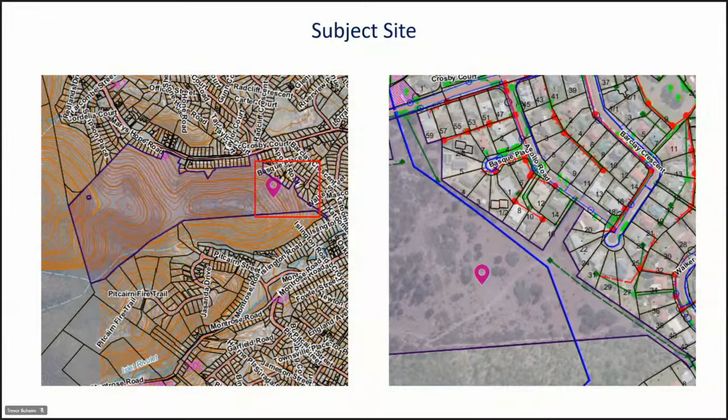So this application is actually assessed under the Glenorchy Interim Scheme 2015 because the application was valid before the new planning scheme came into effect. So three zones apply to the proposal, and the proposal is considered to accord with the intent of each zone.

Most of the proposal is within the low density residential zone. You can see that in the form of a pink triangle, and I've written over the top what the zoning is. The purpose of the zone is to provide for residential development where there are some constraints. In this case, the proposal is for larger lots on steep land.

Then lot 1 and part of lot 15 are within the general residential zone. That's the part of the land that adjoins Mary's Hope Road. But only lot 1 is assessed under the provisions of this zone because most of that lot is within the zone, while for lot 15 only a small part is within that zone. The purpose of the general residential zone is to provide for residential development on serviced land, and there are service connections in Mary's Hope Road for lot 1.

Then the third zone only really affects the balance lot, and that's the green or turquoise zone - the environmental management zone. That applies to the balance lot, and it does include a building area. It also applies to the access strip at the end of the triangle for lot 13 that goes to Islington Road - that's a very small part of the lot within the environmental management zone. However, the building area is noted to be situated within a cleared area within that zone, and the access strip would require minimal vegetation clearance, so it's considered that the development also complies with the environmental management zone.

It's also noted that there is an easement on the southern side for bushfire management, which is within the subject lots, but they'll be outside the building area for those lots. On the eastern side, we have an easement for power lines, which is also going to double for bushfire protection as well - that is actually external to the subdivision.

And then as part of the balance lot, it's proposed to adhere to the titles, so that there'll be only one title for the balance lot. But there's no development other than the proposed building area for the balance lot.

So the lots vary in size between 1,001 square meters and 2,492 square meters, and there are 2 internal lots as well, and the building area, like I said.

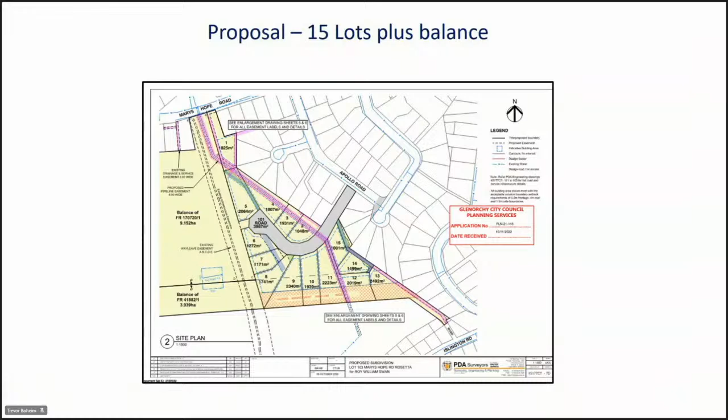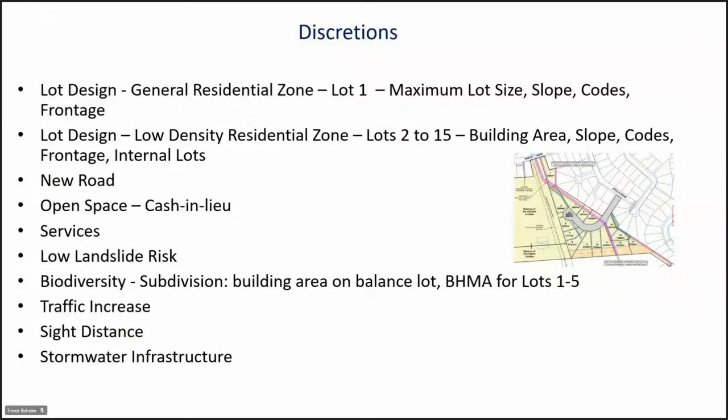You mentioned before you didn't want to address the authority, though. I just want to check you don't want to address the authority tonight? Yes, I'm sorry, I'm a little bit... Oh, that's okay. I just said now, if you do want to address the authority, now's your opportunity, but you don't have to, no pressure. No, I don't want to. That's okay, no problem. Thank you.

And we do have one of the applicants, Mr. Swan, here. Would you like to address the authority at all, Mr. Swan? No, not at this stage, unless there's any questions. Okay. Oh, Mr. Swan, you mean? Yep.

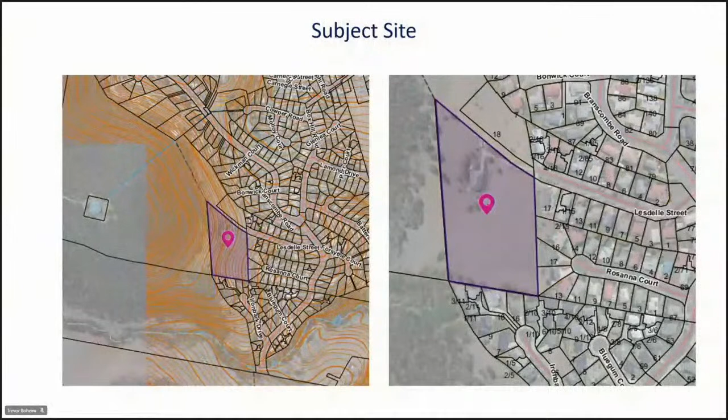Thank you, Chair. Can we have the first slide please. The subject site, the principal site, is 19 Lesdelle Street, located on the western end of Lesdelle Street. On the left-hand side you can see a map where the site is highlighted in purple on the side of the hill. On the right-hand side you can see the same site a bit more close up, showing it's at the end of Lesdelle Street and contains an existing house. You'll also note it's mainly cleared of vegetation. The other two addresses, 18 and 29 Lesdelle Street, are affected by the subdivision for the road lot, and the property at 2/10 Ironbark Drive, in the southeast corner, is affected by a service connection. Next slide please.

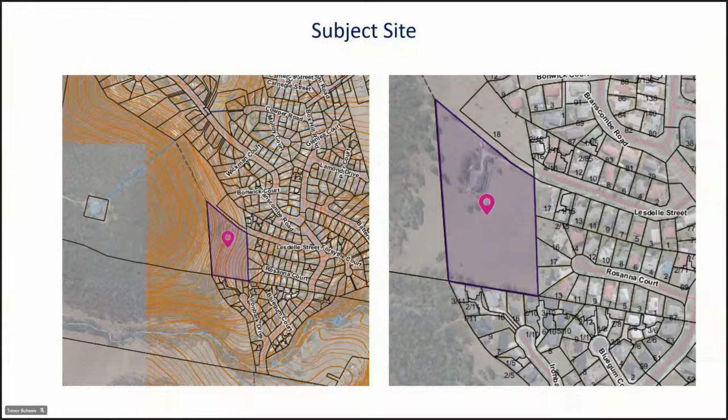So all of the property is located within the general residential zone in red, and an adjoining environmental management zone in olive to the west.

Again, the proposal accords with the purpose of the general residential zone, which is to provide for a range of residential developments, which includes multiple dwellings. The general residential zone goes around 3 sides of the property, and where the hill and forested area are, that land is within the environmental management zone. That won't be affected by the proposal at all.

Can we have the next slide, please? So this shows the proposal. The application is for 28 additional dwellings on a site with an existing dwelling and subdivision for a road lot.

You can see on the right-hand side we have the end of a cul-de-sac. That's not there at the moment, so that's part of the application. The road finishes in a dead end at the moment, and a small amount of land will be taken for the area of the cul-de-sac, where there are currently 3 access strips for 18, 19 and 29 Lesdelle Street.

The cul-de-sac was necessary to service the proposal with waste management. The proposed dwellings will be arranged in 5 rows around internal roads, and the existing dwelling would have separate access with the existing driveway, as you can see on the plan.

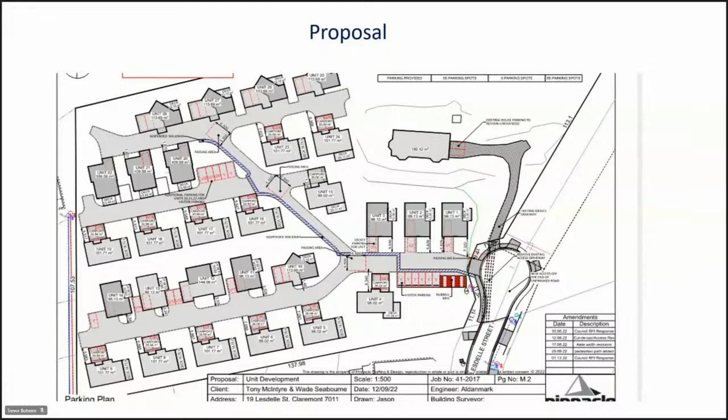It's proposed to do the development in 7 stages, so there'll be staged titling, and also 7 stages for the proposal. In terms of discretions, let's have a look at the site photos first.

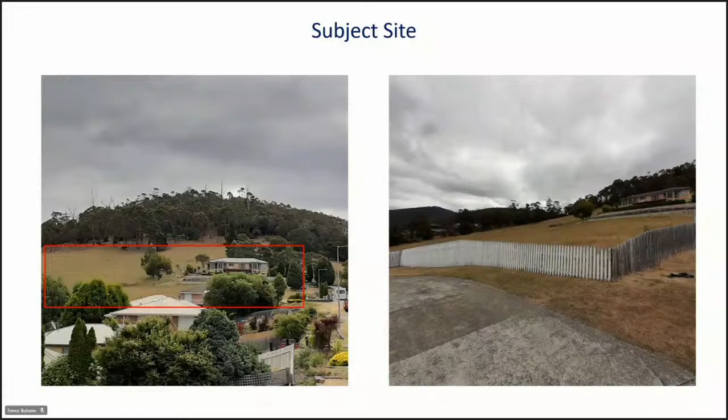Next slide, please. So this shows the access, the dead end at the moment. The front part of that access strip is where the cul-de-sac is going to be. The photo on the right-hand side is looking back down at the houses in Lesdelle Street. That's looking east. Next slide, please.

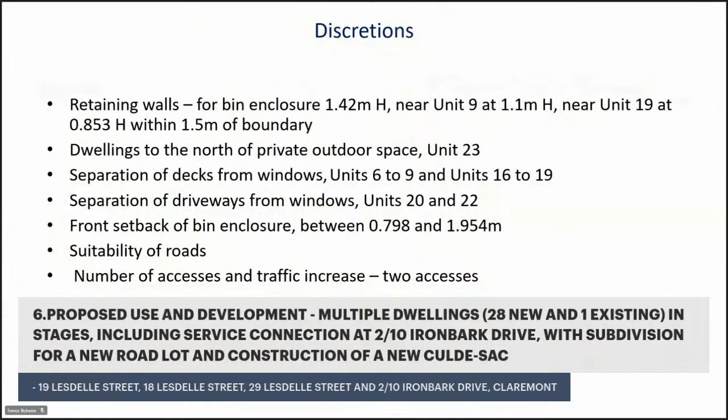Next slide, please. So this is showing the discretions. Retaining walls are usually discretionary for two reasons: either they're higher than 1 meter in height, or they're closer than 1.5 meters to the boundary. There's discretion for the retaining wall for the bin enclosure, which is 1.42 meters in height. There's also discretion for a retaining wall near unit 9, that's 1.1 meters high, and one near unit 19, that's less than a meter high but within 1.5 meters of the boundary. It's considered that those retaining walls are acceptable and would not cause any problems in terms of overshadowing or anything like that.

Another discretion is for dwellings to the north of private outdoor space. A lot of the dwellings do comply. There's usually a private outdoor space area, which on the landscape plan - I think it's the third or fourth plan in the attachment - that's the nominated private outdoor space. It's a minimum of 4 by 6 that each unit's got to have, although most units have more than that, but that's the private outdoor space that has to comply with certain requirements.

Some of the dwellings do have private outdoor space to the north. However, they comply with the performance criteria because only half of it will be affected on the shortest day of the year, which satisfies the criteria. It's only unit 23 that cannot comply, with more than half of its private outdoor space affected by the other unit. However, that dwelling's primary private outdoor space is nominated in front of the unit, but they also have more private outdoor space at the back, plus a balcony. So despite the nominated space being affected, it was considered there's sufficient private outdoor space to cater for residents' needs, and that was deemed acceptable.

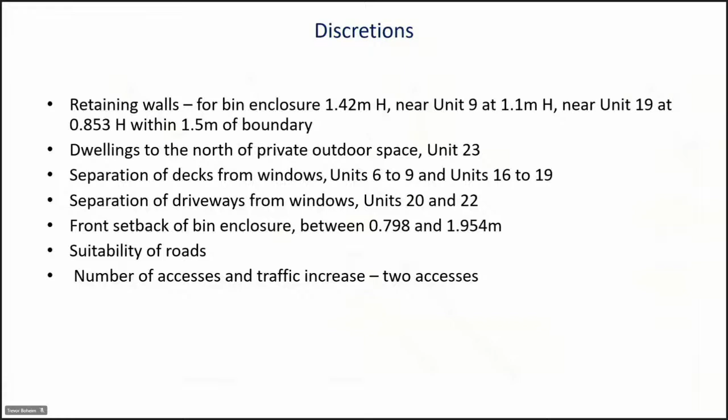In terms of representations, we received four. The first issue concerned the road network, specifically the capacity between the Southern Outlet and Kalang Avenue, but those locations are outside the Glenorchy Council area, so we can't do anything about that. In terms of overall traffic, it was considered that the existing road network can cope quite easily with the additional traffic, so that was considered satisfactory.

The next issue raised was fencing costs. Fencing costs aren't regulated by the planning scheme, but rather under the Boundary Fences Act, so it's usually an issue between neighbours who must negotiate anything about fences. That's outside of what we can consider under the planning scheme.

Another issue raised by 3 of the representatives was building height, privacy and overshadowing. That is actually something the planning scheme does regulate. The main concerns were units 6 and 7, a unit in the bottom row in the middle, and unit 14 in the second row on the south boundary. We looked at that, and those units comply with the maximum height. Maximum height is 8.5 meters, and the highest of those 3 units is 7.2 meters in height.

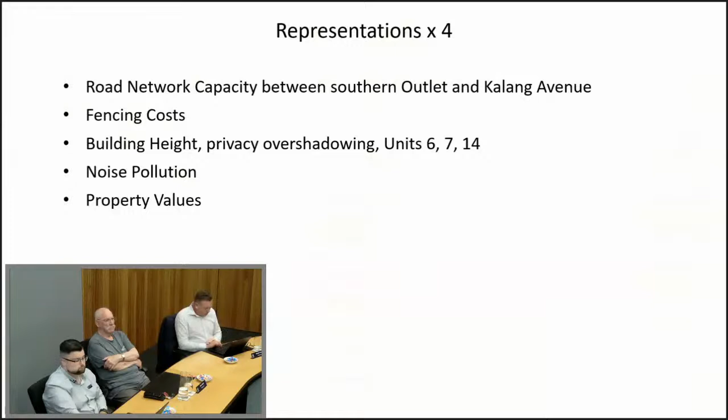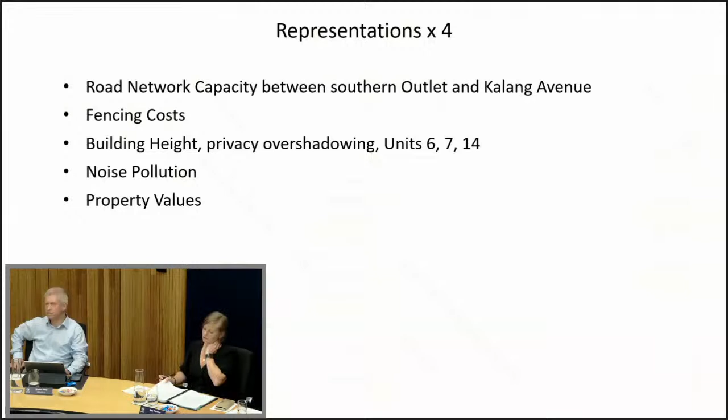The next issue was noise pollution. People were concerned about noise from the dwellings, but that's not something we can look at, since the planning scheme only regulates noise from industrial sites, not residential properties. Of course there will be a change, as at the moment it looks like a semi-rural, quite serene area next door, and that will change with urban development. But it's noted the site isn't being developed to full density. The proposal is one dwelling per 640 square meters, while the scheme allows one dwelling per 325 square meters, so it's only about half as dense as it could be. It's not expected there'll be much noise anyway, no different to any other urban environment.

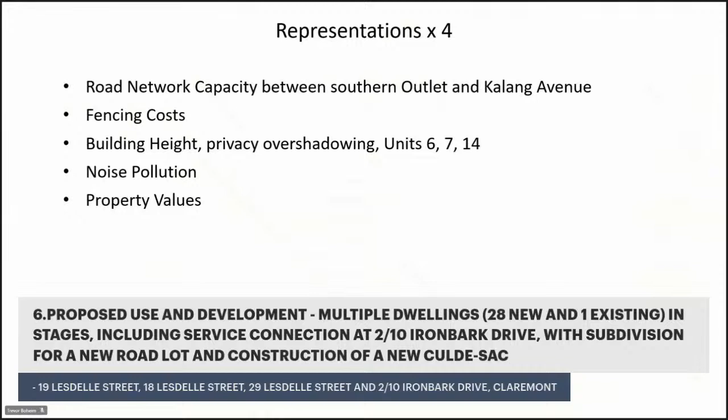The last issue raised was that this proposal might affect property values. Again, that's not something the planning scheme regulates, so there's nothing the council can consider regarding property values. It's outside any of the standards we must consider.

In terms of conditions, there will be a condition that the development is done in 7 stages, complying with the staging plan in the attachments. Again, there's a condition for maximum height of 8.5 meters, a condition for the grade of private open space as shown on the landscaping plan, and a landscaping condition for screening the bin enclosure. This is in addition to other landscaping conditions imposed by the development engineer, plus all the development engineering conditions recommended as well. Overall, the proposal was found compliant with the planning scheme and is recommended for approval.

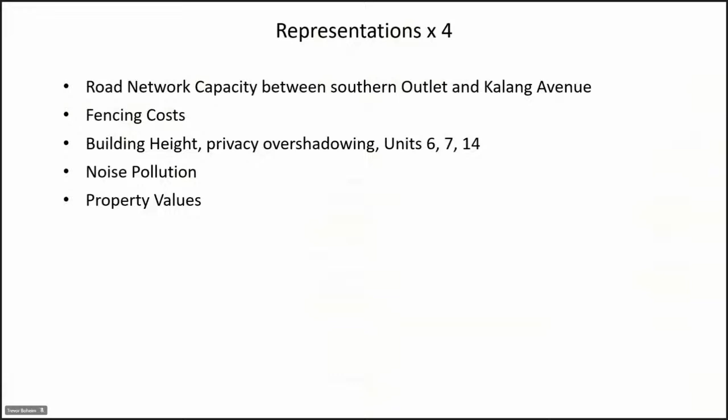Thank you, Mayor. Just a question regarding the waste collection, excuse me if I've missed the detail. Obviously there'll be bins, I'm assuming 3 for every unit? No, I think they're shared bins. The next one I think is 1 for each, but this one I believe was shared bins, a total of 30 in one of the conditions. If you go to page 127, there'll be a total of 30 bins that are shared, and not all of them collected each week, because there are alternative weeks for which ones get collected.

Question resolved. Thank you. Excellent. Yeah, so I think there's a condition.

There is one condition about waste management, condition 36, which relates specifically to the design for the bin enclosure. It says it must suit 30 by 240 litre wheelie bins. My understanding is there's nothing in the legislation that allows us to impose conditions on the number of bins, but we can give advice to applicants and ask that they work with our waste management area to come up with a solution.

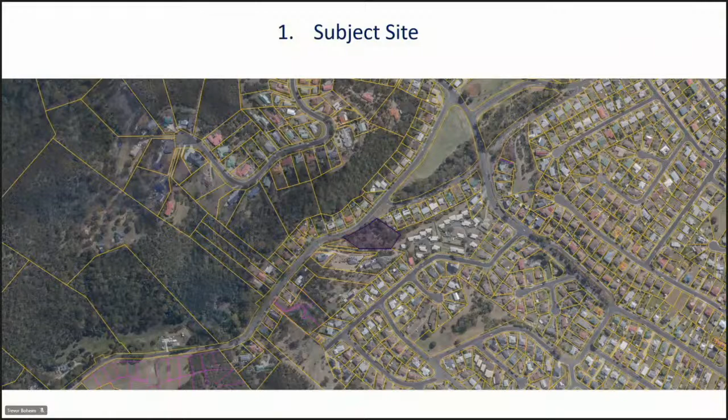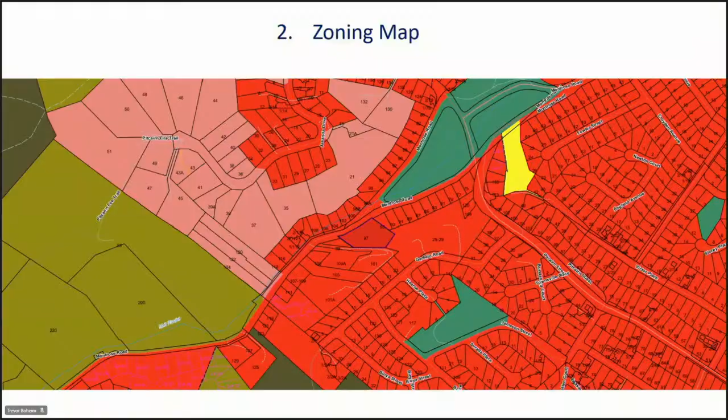If you go to slide 1, this shows the subject site. The proposal is for buildings that will range between a maximum of 2 and 3 stories, so it'll be a combination on the site. If you go to slide 2, the zoning map - the property is zoned general residential, and it's one of the remaining large undeveloped parcels of land, as you can see there at the end of Montrose Road. If you go to slide 3, this shows the site plan.

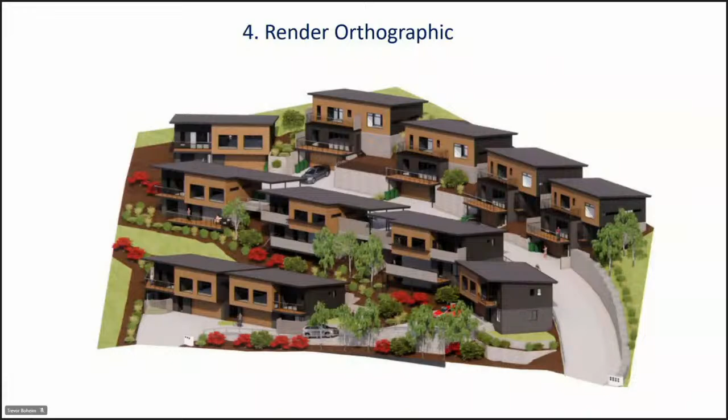So the site is particularly steep, and the way the developer has dealt with this is by providing 2 driveways on site. In addition, we had discussion with the developer for providing pedestrian access and also for managing waste pickup. The footpath is proposed to be constructed along Montrose Road in addition to works on this site.

If you go to slide 4, this shows a useful 3-dimensional proposal, and as you can see, the dwellings have been layered, so right at the back, looking down from the house above, they will look single story. You may also notice on the left-hand side there's a blank area - the proposal is burdened by an underground TasNetworks line, so this has been done in conjunction with discussions with them. The proposal has a number of discretions, mostly raised due to the slope of the site, and has been designed to minimise cut and fill.

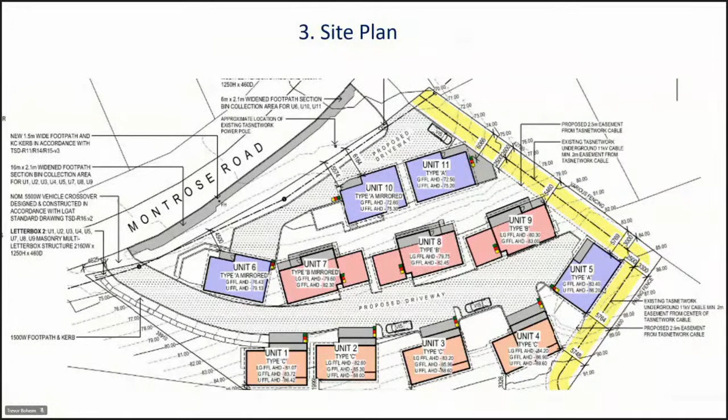Yes, however it may not look like that visually because on the opposite side of the road you've got 4 properties facing it. So because the block is so large, yes, we do have 2 accesses, and that is a discretion. However, there will be quite a gap in between.

Thank you, there's no further questions. We have a recommendation that a permit be granted for the proposed use and development of 97 Montrose Road, Montrose, subject to 14 conditions outlined in our papers. There were no representations received. Do I have someone to move that as a motion? Alderman Yaxley, someone to second, Alderman Cockshutt.

Alderman Yaxley: Thank you, Mayor. Like we've said in the last couple of comments, it's great to see development happening in our municipality, and it's great that developers are looking at taking advantage of what land is available. So it's a great positive story and a positive action to have, so I'd be happy to recommend it.

Thank you, Alderman Yaxley, any further discussion? No questions, just echo Alderman Yaxley and yourself, Mayor, your commentary in regards to development in the Glenorchy municipality. It's great to see, and in terms of the housing crisis, the more housing we can have in the city is even better. So it's good to see this all coming through.

Thank you, Alderman Cockshutt. I agree, and I am satisfied that the report we've been presented with demonstrates that the performance criteria around the 8 discretions are met. And I'm pleased to see there are no representations to this particular item as well, so very happy to support the motion before us.

Yes, thank you, Chair. This application is for cement silos and other infrastructure for an existing concrete batching plant at the Hazell Bros site in Derwent Park. If we go to the first slide, we can see here on the left the wider site and the surrounds. The concrete batching plant itself is in the little triangular extension of the site and is solely in that triangular section. The site sits between Main Road and the Brooker Highway.

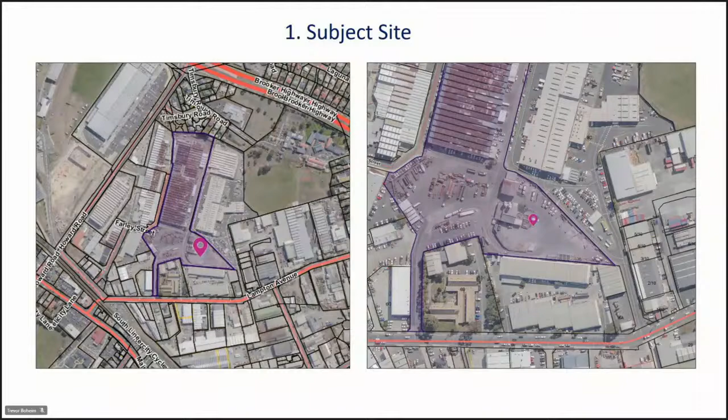There is the Goodwood Primary School to the northeast and the showgrounds to the northwest. The proposal is in the general industrial zone. It's considered to be suitably located in that zone, being a heavy industry, and accords with the zone purpose statement.

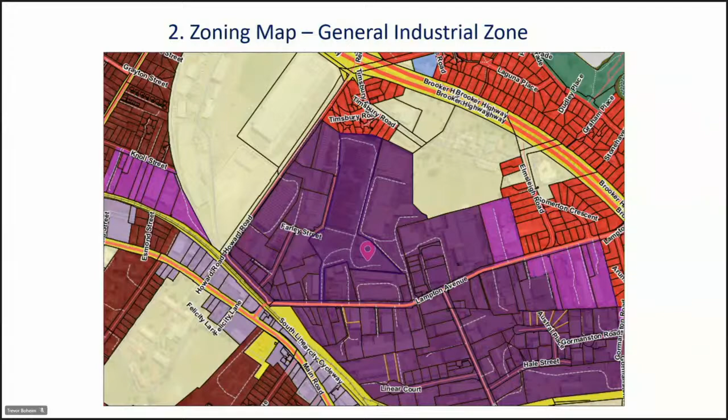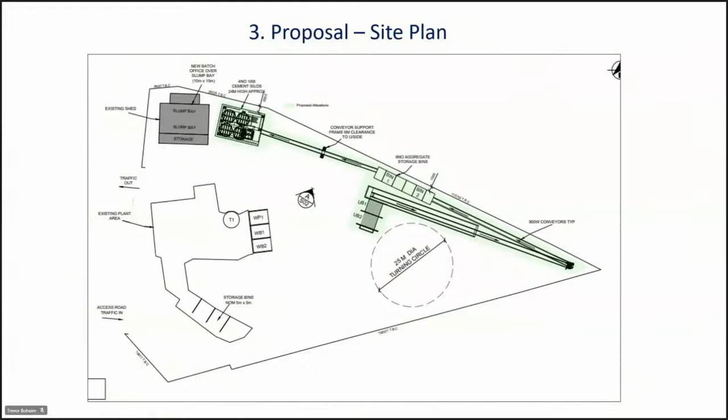The proposal is, I guess, an extension of the existing plant, and will add a wet mixing component to the plant, adding to what is currently there which is like a dry mixing plant. So it will diversify what they can produce. It will increase the capacity by about 20%.

And this plant, the additions will work in tandem with what is there, but it's only increasing the capacity by around 20%. On the site, the existing plant was approved in 2003, so it's been operating there for around 20 years.

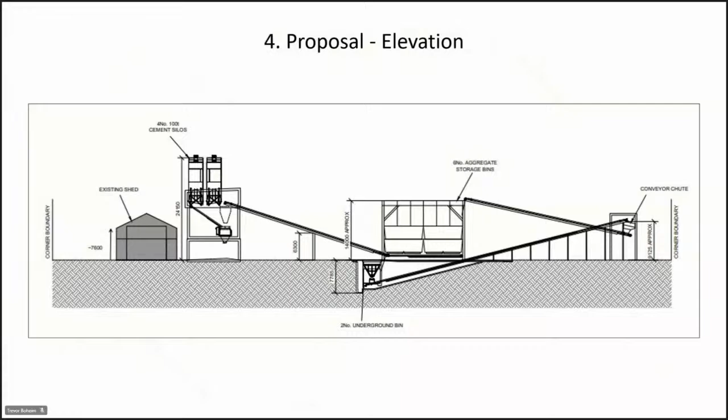And the proposal with these upgrades will reduce the requirement for a front-end loader, which is currently used to load in the different materials. The upgrades will automate that and bring the plant up to standard, or improve its operation, which will greatly reduce the impacts from the front-end loader, being noise and dust are the main impacts that it creates. If you go to number 5, thanks, Trevor.

Under the assessment, there's 2 discretions. The first one is under the zone standards for the building height. The acceptable solution allows for a building height of 20 metres, whereas the proposed silos are 24.95 metres.

However, it's considered that the proposal complies with the performance criteria, as that extra height is considered necessary for its use, and any impacts on adjoining properties is not considered to be unreasonable, and the proposal should improve the operation, reduce emissions such as noise and dust, and therefore should improve or reduce any impact on adjoining properties.

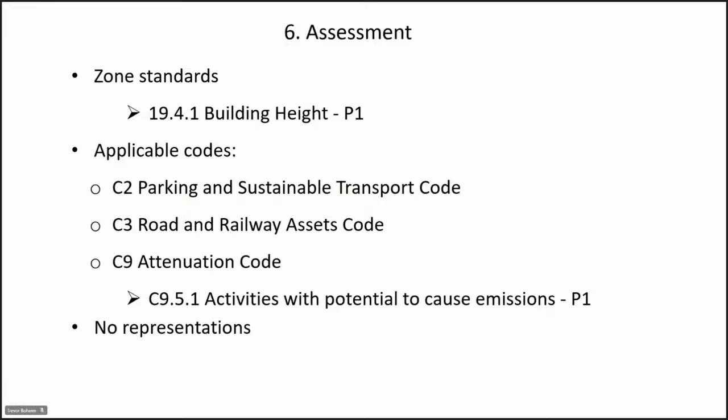In conclusion, it's assessed as complying with all relevant standards of the planning scheme and is recommended for approval with the 9 conditions.

Great, thank you Lewis, very well presented. Any questions for Lewis? I would like to say - oh sorry, no, you go. Sure, yeah, absolutely, Alderman Yaxley.

Thank you, Mayor. Just a quick question regarding the other 2 silos - would they remain or would they be removed?

Yes, they would remain, and so this proposal is seen as an expansion of the plant. What's existing will remain. The dry mixing plant is required for the more specialised orders, such as exposed aggregate or any colouring, which wouldn't be able to be produced in the new extension area. So they'll retain both and mainly use one at a time on a day-to-day basis, and schedule the different jobs around that. But yeah, it would remain.

Yes, and just on to that, do you know the existing height of the current 2? That's a good question - you haven't got up and measured them, Lewis? Not by hand, no, don't have that. I could find out, but not on hand.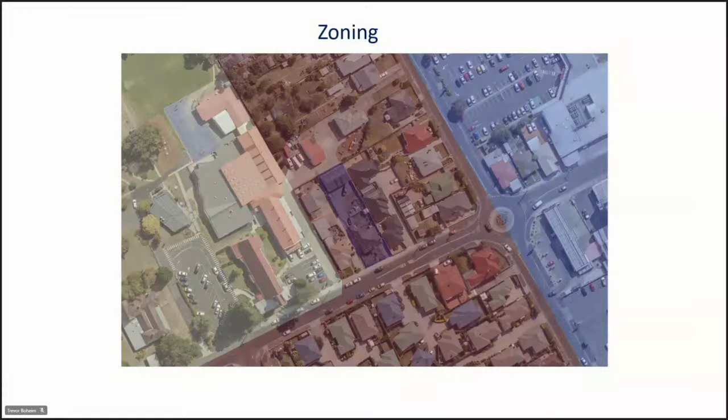So as I mentioned, there are two standards which we need to look at. Now, this is the proposal—sorry, back to that. Go to the next one, please.

This is the proposal plan. It's an open walled carport, 3.2 metres wide, 2.2 metres high at the posts. It's got an apex roof, which I measured, scaling off the plans, to be 2.6 metres at the apex. There's 1 metre off the house, 1.5 metres off the side boundary, and 2.3 metres from the front boundary.

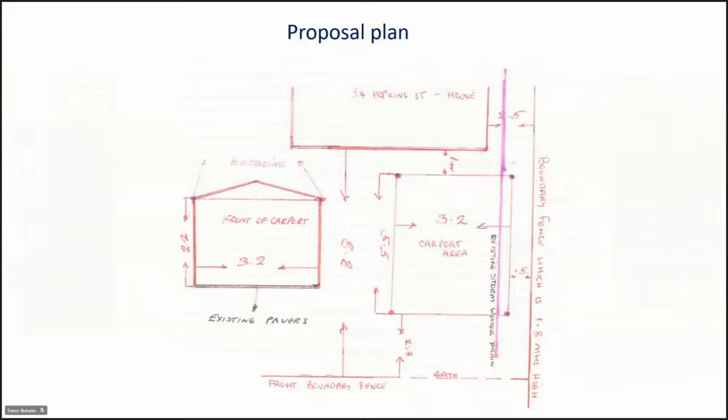If we go to the next picture, this is the property in the middle, the red brick house. There is a similar design and age dwelling on the left-hand side, the west, and on the right-hand side, the east, there's a unit development—3 hipped roof, relatively modest size, multiple dwellings.

Go to the next one, please, Trevor. I'll get into the assessment under the standards, because this is where this carport, which is up the street, becomes relevant. When we have a carport less than 4 metres from the front boundary setback, we have performance criteria which require that the carport have a setback which is compatible with the setbacks of existing garages or carports in the street.

So the logical thing to do is to go and find if there are any in the street, and there is one at the school site, 144 metres away to the west.

You will have seen in my assessment I've gone into a bit of an argument as to how a nominally consistent distance is not necessarily compatible in the sense of the term, where compatibility tends towards harmony or correspondence, whereas a nominal consistency would be picking a dimension and saying this dimension exists somewhere in the street, so therefore we have a precedent or a rule to follow.

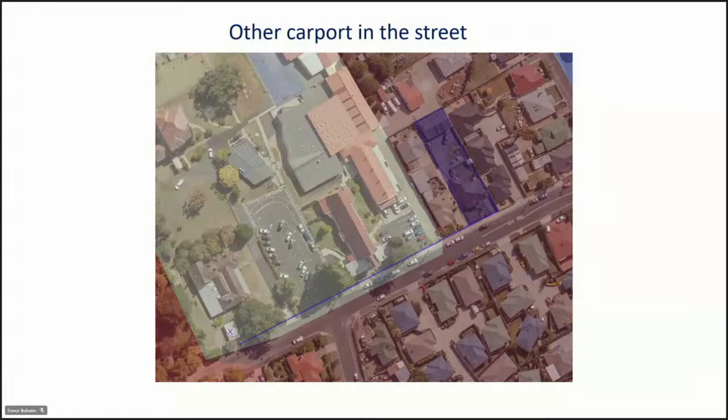So in conclusion, the proposal is assessed as failing to comply with two of the relevant performance criteria. Again, that is because it doesn't present a compatible harmony with established carport dwellings in the street, and the other being for consistency of setbacks for dwellings, where there is no other dwelling in the street which is built within the frontage setback. For that reason, it's recommended to be refused.

Thank you. Peter, any questions for Peter?

Yes, Alderman, thank you, King. Chair. So Peter, your biggest concern is the setback?

That's the concern that I had. The performance criteria caused me to look at this, being that any carport set back less than 4 metres needs to be compatible with the setbacks of carports existing in the street. You can have regard to topographical constraints, of which there are none in Hopkins Street. So yes, I can't find that this carport is compatible with the setbacks of existing carports.

And I get all that, and your advice is sound, and we appreciate that, you always present really well. So, if we were to, I'm not saying we are, if we were to disagree, is that another motion? Yeah, that's right. That's what I figured. We'd have to have an alternative motion.

To disagree, that's right, approve it. Yeah. Peter, can you just talk me through, you mentioned about not setting a precedent, because one of the things that runs through my mind is if there are none, you said the other one, 144 metres up the road, we can't consider, like in terms of compatibility.

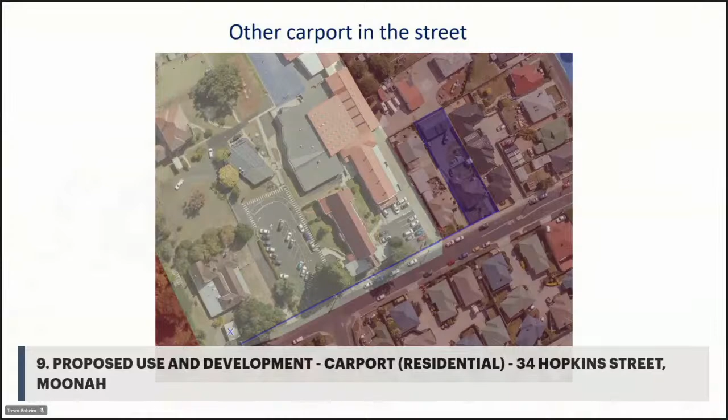No, aesthetics I suppose is part of it. What we're looking at is does this development, as the objective states, provide consistency of separation of dwellings. I don't want to get my performance criteria mixed up - we've got P2 and P3. The objective for the standard is the same, and I'll read it because it might be helpful. The objective is that the siting and scale of dwellings provides reasonably consistent separation between dwellings and their frontage within a street, provides consistency in the apparent scale, bulk, massing and proportion of dwellings, and provides separation between dwellings on adjoining properties to allow reasonable opportunity of daylight and sunlight to enter habitable rooms. C, I think, is less critical for this one. So it's really about A and B - consistency in apparent scale and bulk, and reasonably consistent separation between dwellings and their frontage.

Critically, the school is not a dwelling, but it does have a carport. When we look at the standard which says a garage or carport for a dwelling must have, not less than 4, a setback from a primary frontage that is compatible with the setbacks of existing garages or carports, we can bring in the school on that one. For the other one we're talking about dwellings, and the school isn't a dwelling. So then we're looking at what is the effect of a dwelling, which includes its carport, being forward of that building line. As I said, in a general principle sense, building forward of the building line where it isn't happening like a set of terraces or whatever is generally considered a less than positive outcome in urban areas.

So, through you Chair - we've knocked back things before that have been recommended. Yep, and probably got a bit of trouble with the tribunal. Could somebody take this to tribunal and say these guys are unfair, or is this... I think anyone has the opportunity to appeal if they wish. The applicant equally has an opportunity to appeal if the refusal is upheld or endorsed, however you want to term it. So this isn't the end by any means - this is you making a decision based on my recommendation.

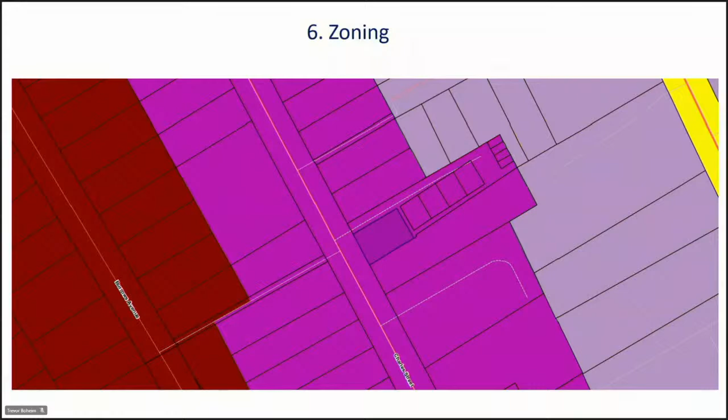The requirements are that if there's land within 50 metres of the site that's in a residential zone, then those factors come into play. In this instance, in Burrows Avenue, there are properties in the inner residential zone. However, those properties are more than 50 metres from the subject site. So that's important, because it means that when we assess this application, even though there are residential uses immediately behind and adjoining to the north, we don't have anything in the planning scheme to look at noise and hours of operation.

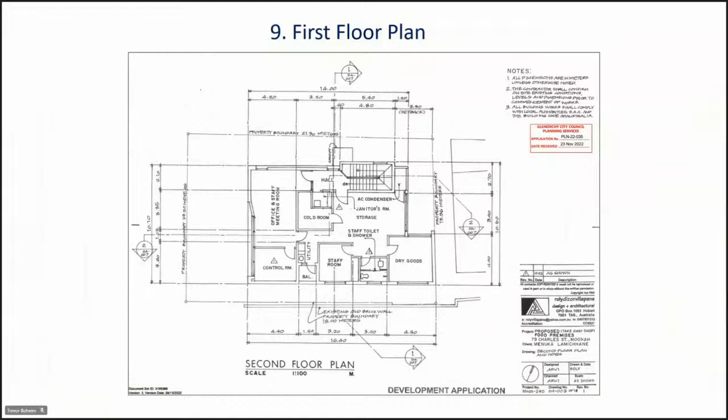The proposed development is, as I said, the site of an existing food van. What is proposed here is to construct a two-level premises with a takeaway shop on the ground floor and 4 car parking spaces on the surface as well. On the first floor there are some storage areas, a meeting room and some staff facilities. It's a two-level building, I'll run through that there. In terms of discretion, there's an indication of the elevation of the building, and that top view, indicated as the southwest elevation, is the view from the street.

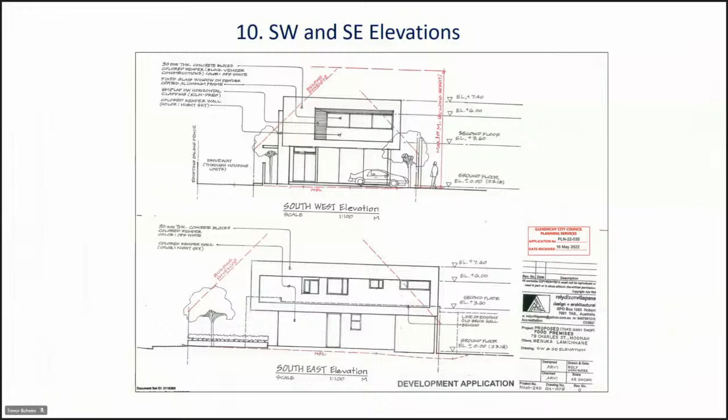The one below that is the view from the driveway immediately to the north of the property that accesses the 4 units. The northeast elevation is the rear of the property, and the northwest is looking at it from the other side, facing back towards the adjoining industrial development.

In terms of discretions, the food services use class is actually a discretionary use within the light industrial zone. The discretion we're considering is whether the use does or does not compromise the use or development of surrounding properties for industrial activities, minimises and manages off-site impacts having regard to the characteristics of the site, the size and scale of the proposed use, and the function of the industrial area.

In undertaking the assessment, it was determined that requirement was satisfied — what is being proposed does not compromise the use or development of surrounding properties for industrial activities. It's quite a small scale, takeaway food use, and the nature of the building is such that if that takeaway food use was to cease at some time in the future, it could be readapted to some other use more consistent with the light industrial zoning.

The second discretion relates to the number of car parking spaces. The assessment concluded that a total of 6 car parking spaces are required, and the development proposes to provide 4, which is a shortfall of 2 spaces. A traffic impact assessment was provided with the application.

Alderman Cockshutt: In regards to the operating hours, you said 12 noon to midnight - if the applicant wanted to go 9 till 5, or whatever hours they wanted, what's the process there? Through the chair, I believe they would have to make another application if they wanted to do that, because it would fall outside the scope of a minor amendment. Okay.

In one sense, there are no restrictions on the hours of operation, but the applicant has basically constrained themselves by indicating which hours they wish to operate. And a principle is that you can only get approval for what you apply for. So if we approve this today and they change their mind 3 months down the track, deciding not to do dinner service and instead focus on breakfast and lunchtime, opening 7 a.m. till 3 o'clock, whatever, they'd have to come back through to council, or what's the go?

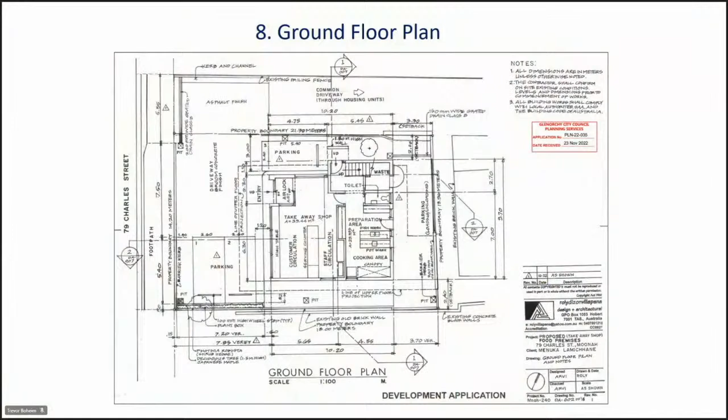Through the chair, it would be unlikely it would come to the GPA because this one only came due to a petition being lodged, which is a fairly unusual reason for something to come to a GPA. You'd have to come back to council. If a permit is issued today for this development, they can act on it and construct the building on the site and operate it. A further application just to vary the hours would only look at that aspect, because all the other aspects are covered off by this permit. So it'd be a new application, but a fairly limited assessment.

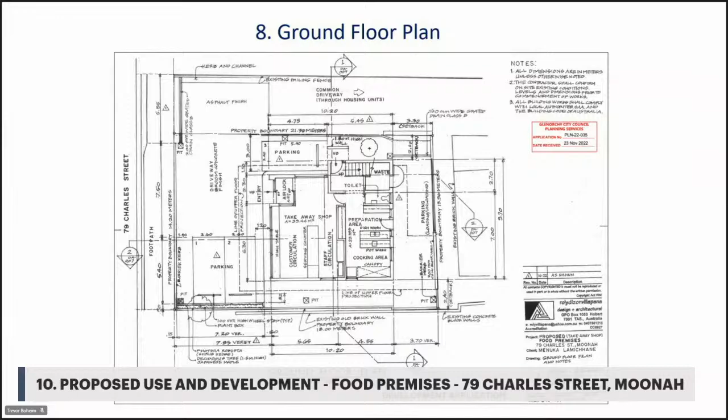And I guess the requirement is 6 car spaces, but because of the on-street car parking, that offsets it basically. Through the chair, the requirement is 6 spaces and they're proposing 4. The planning scheme does provide that other factors can be taken into account to justify a shortfall, and one of those factors is the availability of on-street parking within what's considered a reasonable walking distance of the site. So it's not that they would get a place immediately out the front - it's assumed someone would park 25, 40, 50 metres up the street and walk back if needed.

Alderman Quick: Do we know the current operating hours of the food van? Through the chair, we would know, but I don't have it off the top of my head. So theoretically, he could be operating from noon till midnight with the food van now? Through the chair, that's quite possible. And I guess the impacts of this occurring within a shop, within an actual building, would be much less than the food van that's open with open doors and things.

Thank you. Any further questions? Alderman King: Thank you, Chair. So again, had it not been for the petition, we wouldn't be having this discussion, right? Through the chair, that's correct. So in reality, there's not much to be concerned about from your perspective.